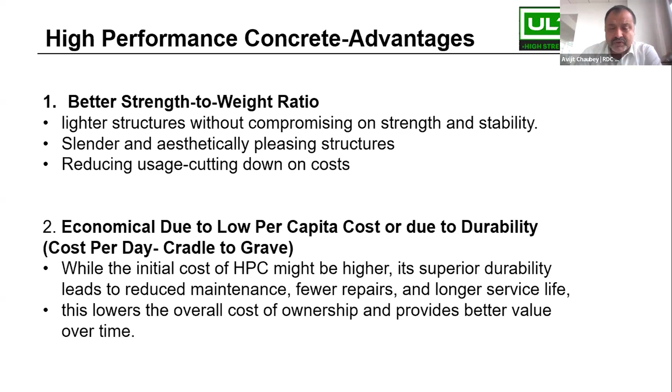So it becomes very economical to the entire nation when the entire population is moving closer and closer. For example, it would be much cheaper for a state if the same building has got the office and the residence of the same person. So instead of traveling from one part of the city, say from Thane to Churchgate, he can stay in the same building, and that is possible only if we have such arrangements in planning. The answer for such problems lies in high performance concrete.

Now, what are the challenges? After talking about the advantages, the real problem comes in when you start manufacturing high performance concrete. As I was saying, high performance concrete usually ends up being high strength concrete, and most high performance concretes have a very low water cement ratio. This low water cement ratio leads to a very high viscosity in concrete, leading to very high pumping pressure problems. The pumping of concrete becomes a big challenge. And to get the required strength, you have to reduce the water cement ratio.

If you see the old mix design code 10262, it had 6 graphs, A, B, C, D, E, F, and a higher strength cement would require a higher water cement ratio to get the same strength as compared to a cement which has lower strength. Naturally, a high strength cement would end up giving the same strength with very low cement content or a higher water cement ratio. Now, this is the challenge. Earlier, when we did not require such a huge quantum of high strength concrete, we did not have the problems of pumping to a high-rise tower or very viscous concrete.

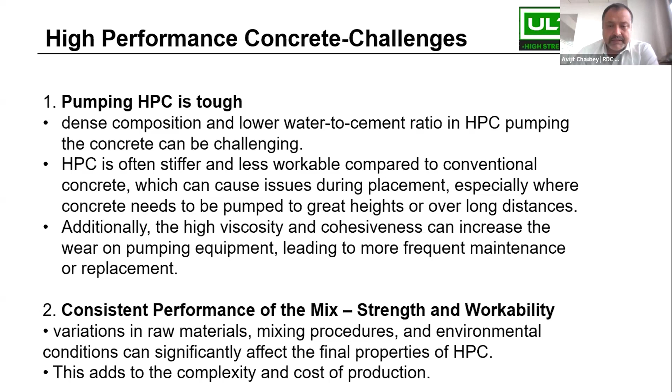And also we require something where you get consistent performance of the mix despite the natural variation that happens in the strength of cement and the strength of aggregates. And also the solution needs to be economical. And one challenge that we always keep on facing is for high-rise buildings, the structure sizes are much higher.

On the bullet train, we were involved in certain sections, and we came across many challenges they were facing. One was, despite what the designers tried, certain portions of the girders qualify to become mass concrete, where the heat of hydration is very high and it was leading to cracks. This was happening because of very high cement content leading to very high heat of hydration and then cracking or other problems. So this is also one of the challenges faced in high performance concrete.

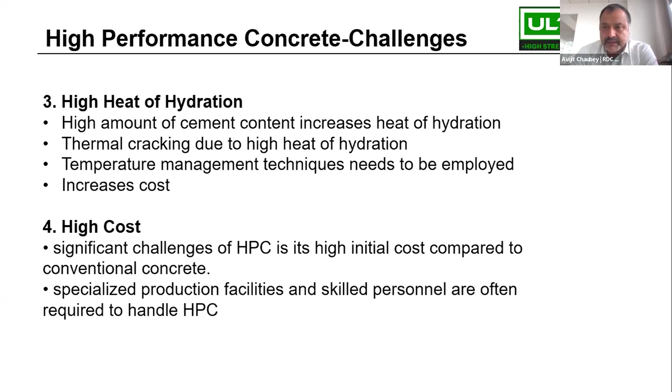And I said high cost because you need a very high amount of cement because of the requirement of very low water cement ratio and also because of high workability. Now, these are the challenges. Now, how can ultrafine material resolve these problems?

To understand why cement gives you lower strength, you need to understand that when cement was first manufactured, it was not of the strength that we get today. Today we are getting a strength of 61 MPa as per the standard testing method, 61, 63. But when the production of modern cement first started, it was by batch process and the fineness was not that high. The first cement that came to India was 33 MPa, 33 grade cement.

The reason was the grinding was not that fine. The chemical contents were not that much optimized. So that led to lower strength. And also because there were no admixtures at that time, we had to use a higher water content for the same cement content, and we ended up getting much lower strengths than what was potentially possible.

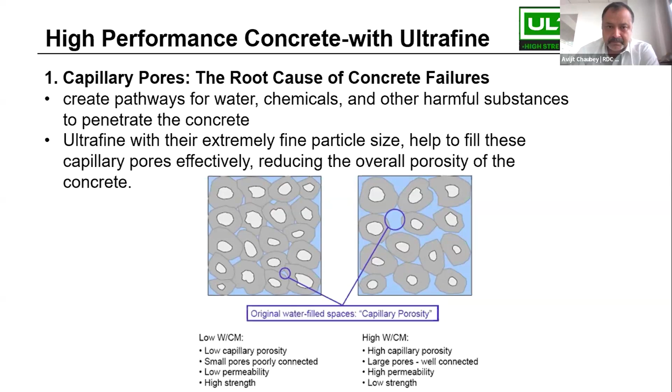So the biggest challenge is that this CSH gel, the material which gives strength to the concrete, has to precipitate on a hard surface. The only surface it finds is the cement particle, and it keeps precipitating on the cement surface. After some time, the cement particle is not able to hydrate because it is getting covered with CSH.

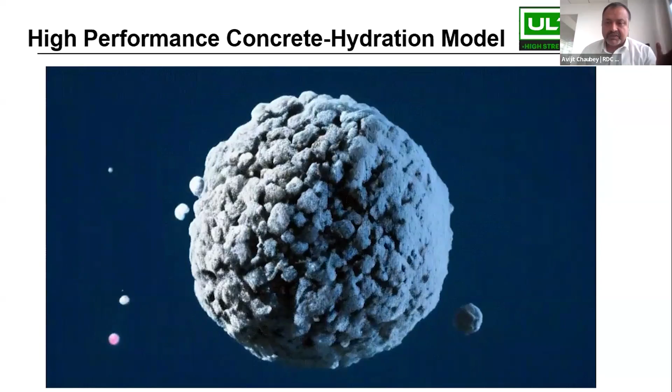Now, with ultrafine materials, we have been able to find certain materials which act like nucleation sites. So the CSH gel, instead of precipitating on the cement particle, precipitates on the ultrafine particle. This way, more and more CSH is formed at early age, and you are able to get a higher strength. So this is exactly what I'm trying to tell.

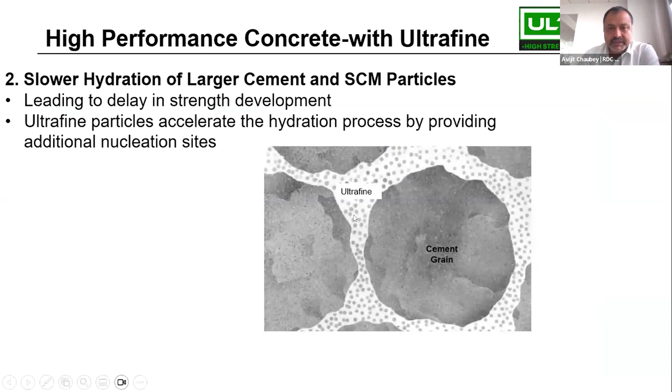Ultrafine materials are mostly 10 to 100 times smaller than cement particles, with a very high surface area. They give you good durability and engineering properties, first because they are SCMs, supplementary cementitious materials, which are non-calcareous, mostly GGBFS, fly ash or silica-based microsilica. And also you are able to reduce the cost by reducing the cement content.

If you design it carefully, you will be able to reduce the cost of concrete, and since you're able to reduce the cement, you're also able to reduce the heat of hydration and all the challenges associated with cement. And obviously one of them is the shrinkage of cement after hydration.